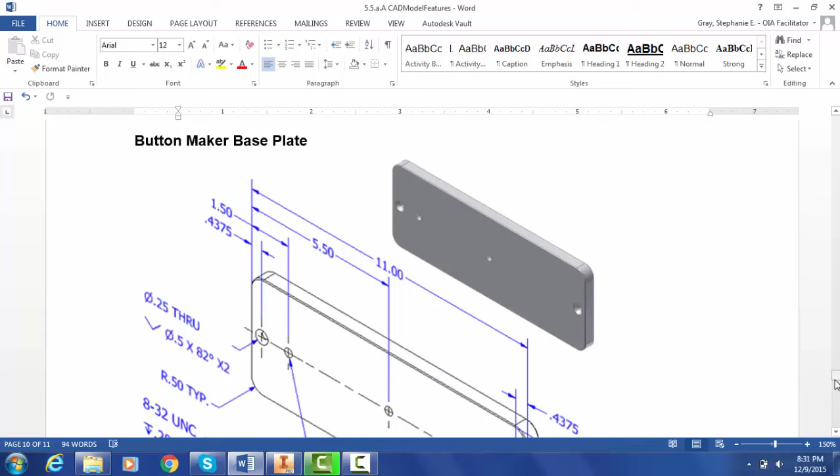So again, in Inventor, we'll start a new part and start a 2D sketch. Obviously, the first thing I want to make on here is just the rectangular shape of the base plate. And it looks like that's 11 inches by 4 inches. And then I'm going to be placing several holes on that plate.

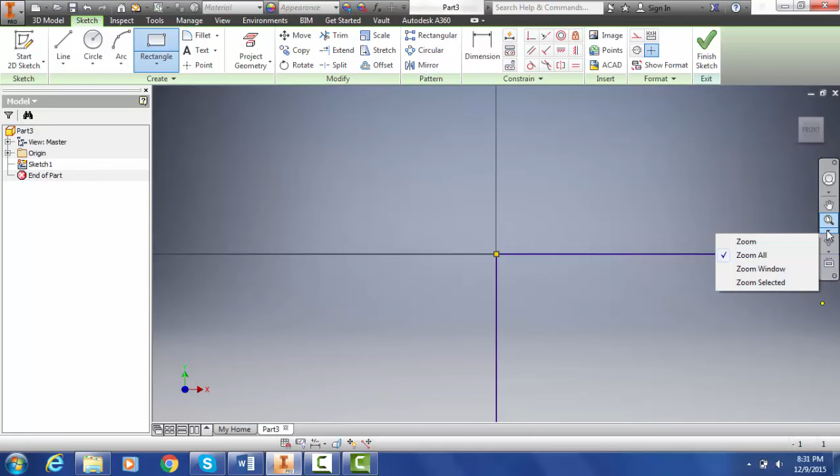So let's go ahead and start with our rectangle. And that's going to be 11 by 4. Hit enter, and I'm going to zoom all. Now if you can't see your zoom all, then you have to click the down arrow and then select it, but that's the one that I typically keep there.

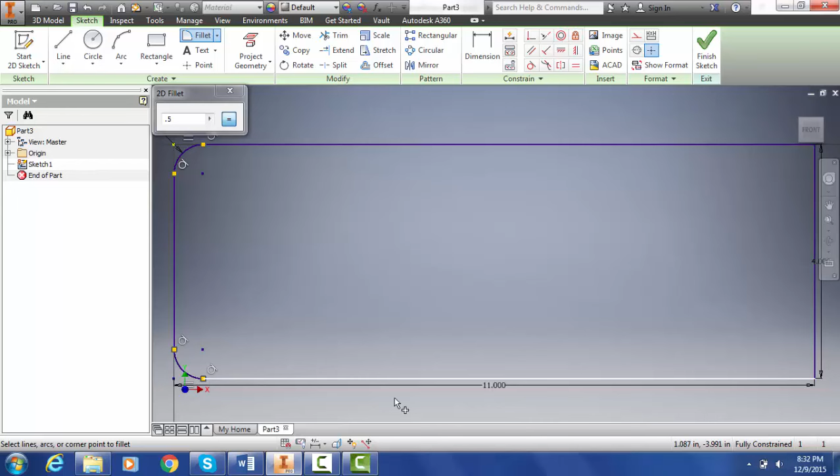I notice that these corners are rounded, and I'm going to see if they tell me what the fillet should be on that, and it looks like it's 0.5 here. So I'm going to go ahead and do my fillet there at 0.5. You can do this in the sketch, so I'm going to change that to 0.5 and then select the two lines that make the corners. So that one, and then I'll come over here and do these.

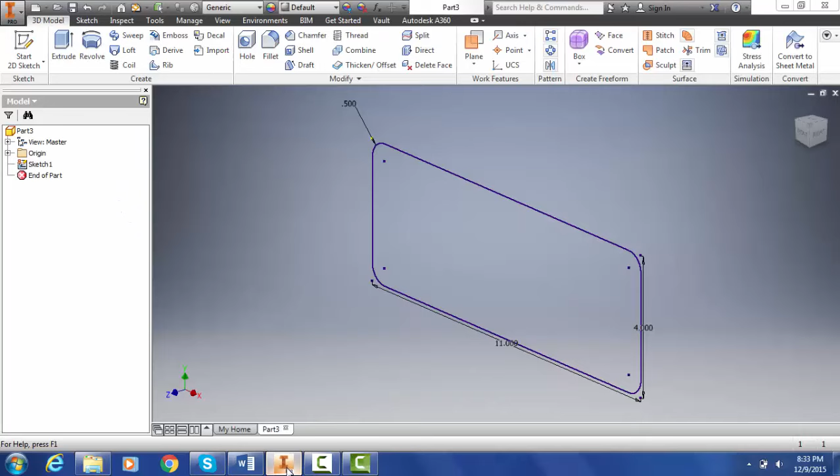Okay, now I can finish my sketch, and I'll zoom all again, and then I'm ready to extrude that base plate. So let's see if they tell us what the extrusion should be, the depth of that. Yep, it looks like it's right here, it's 0.5. So we're going to extrude this base plate 0.5 inches.

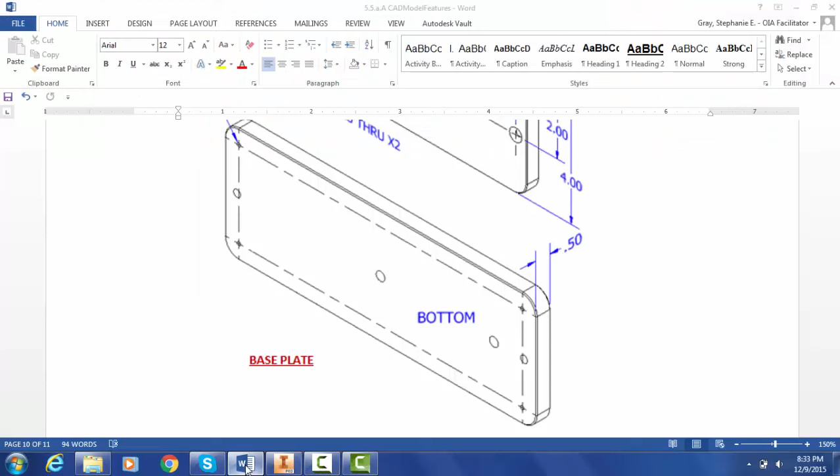Now I'm ready to place my holes, but remember I need points to do that. So I'm going to start a 2D sketch on the front of this base plate, and I need to place points, and I need to look at my diagram to be able to place these points. So it looks like I need 4 points placed. So I'll go ahead and just kind of randomly place those points, and then I'll use my dimensioning tool to get those more accurately placed.

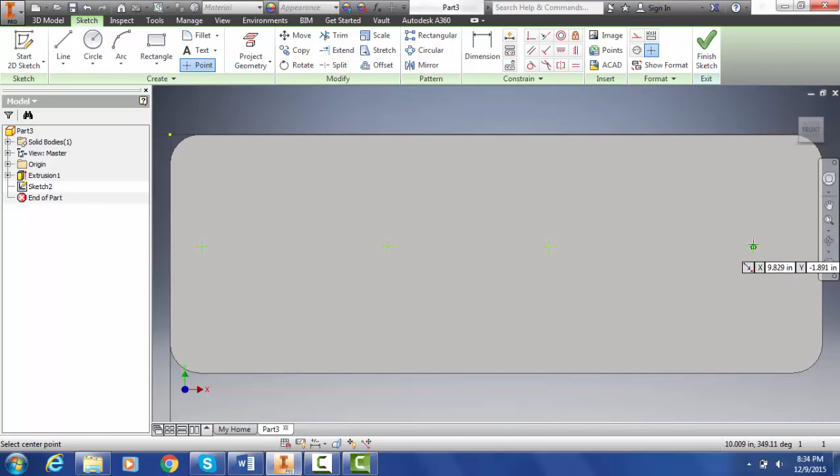So I'm going to just select my point, and I'll just click. There's one. And notice I have this dotted black line, and I really do want that because that helps me know that they're in line with each other. And then there's the 4th one there. I can hit escape and now use my dimensioning tool to actually put those in the right place.

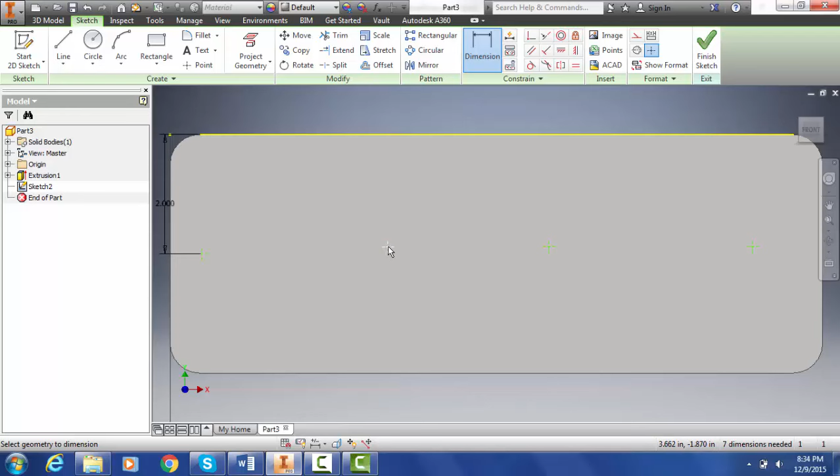So this first hole, since this base plate is 4 inches high, they're all 2 inches from the top, so we'll go ahead and make all of those 2 inches from the top. So I'll use my dimension tool, click the center here and the top, make sure that's 2 inches, and then do the same thing on all of these. That should also be 2. And then the last one here should also be 2. We can hide these dimensions later.

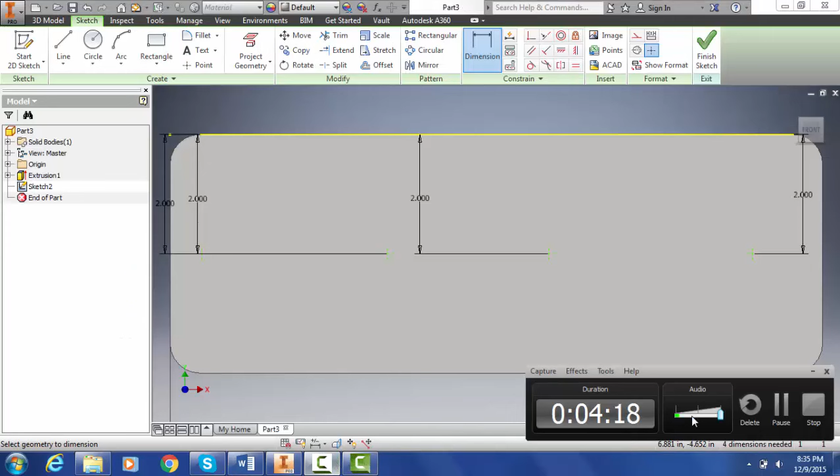Alright, so I've got them from the top. Now I need to know from the side how much they are. So this first one is 0.4375 from the side. So from this side to the middle is 0.4375. And then the next one is 1.5. That one was way off.

Then the next one is 5.5. And then the last one here is 0.4375 from the right side. So I'll go ahead and do that one.

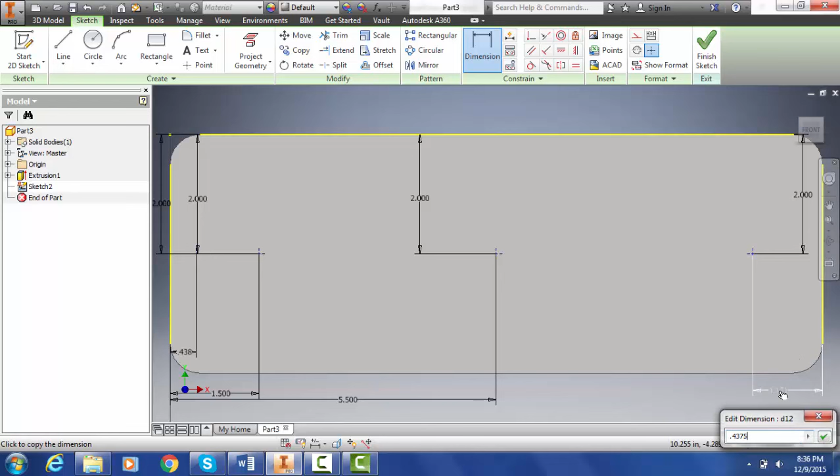Okay, so now they're all in the right place. I can hit Finish Sketch. Again, if you want to turn those dimensions off, just right click on your sketch over in the browser and turn your dimension visibility off. So now we're ready to put the holes.

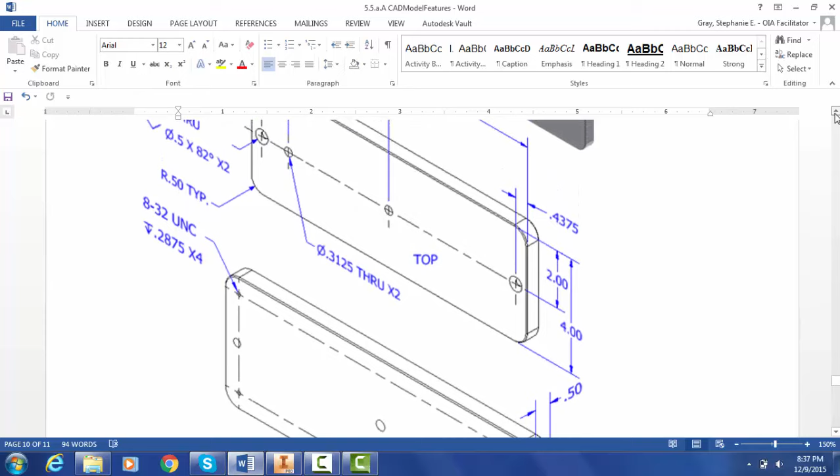Now these are different kinds of holes, and it looks like on this first hole we've got a countersink hole that is the diameter's 0.5 inches, 82 degrees, and we want 2 of those, so it's not only this hole but it's this one over here, and it's going to go 0.25 through. So I'll go ahead and make that one.

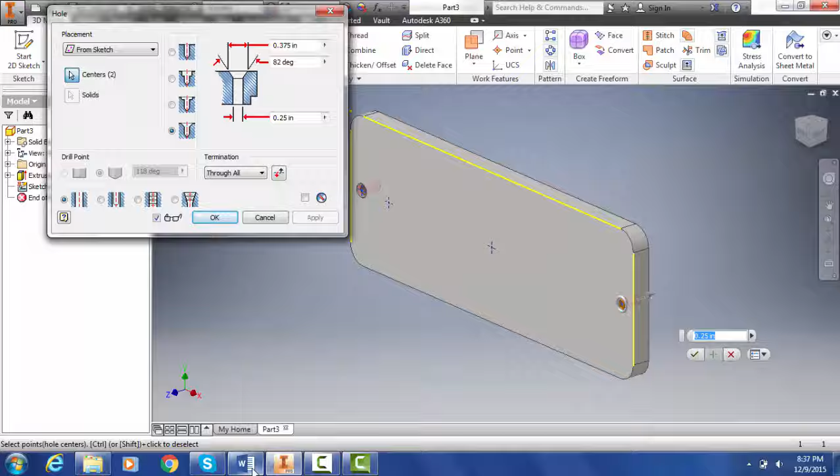So we'll choose hole. Remember, I want to deselect these two. I'm not going to deselect this one because that's going to be the same, but it does need to be a countersink hole, which is this one. And I'll need to go back and look. That's 0.5. So this is 0.5 by 82 degrees and 0.25 through.

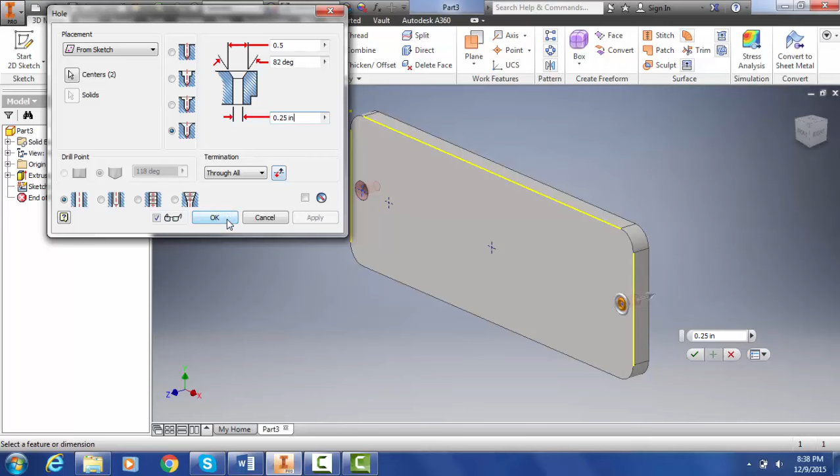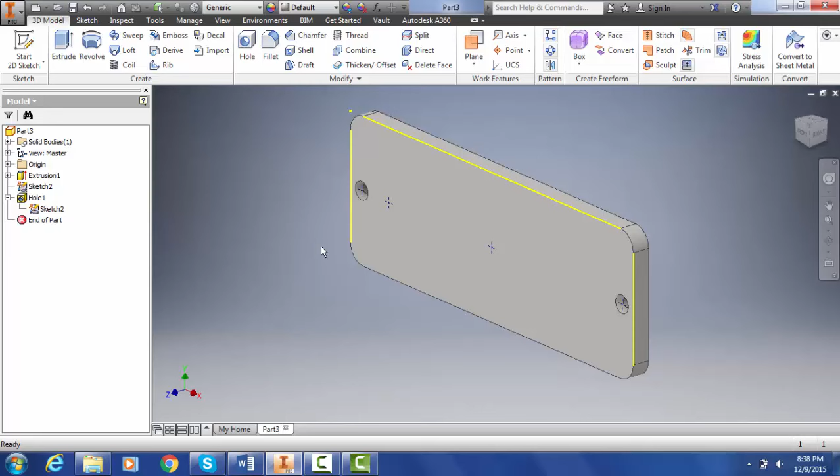So this is already 0.25, and then we'll hit OK there. Now remember, it didn't let me do these other ones, so I'm going to have to share my sketch here. So I'm going to right click over here and click Share Sketch, and now I have that same sketch again, and I can go ahead and do my other 2 holes. And those 2 holes are right here.

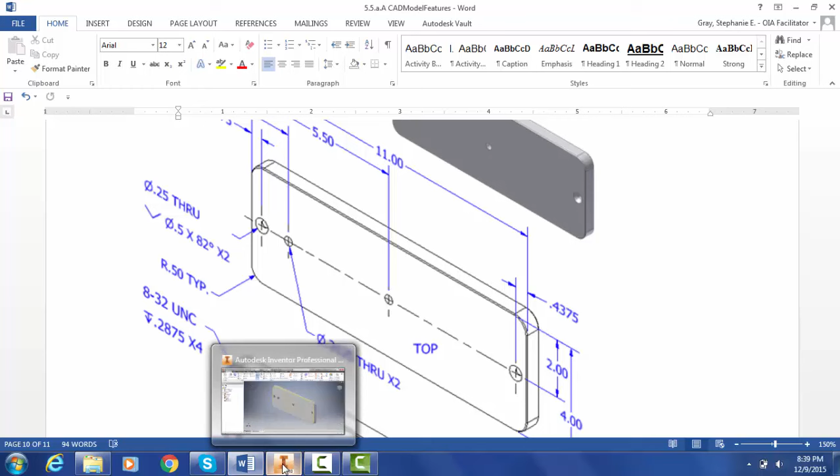They're just normal holes, 0.3125 through, and it says ×2, so that means this one and this one. So 0.3125 is what we need. So back in Inventor, we're going to do a normal hole, and it's just 0.3125. And there's my 4 holes.

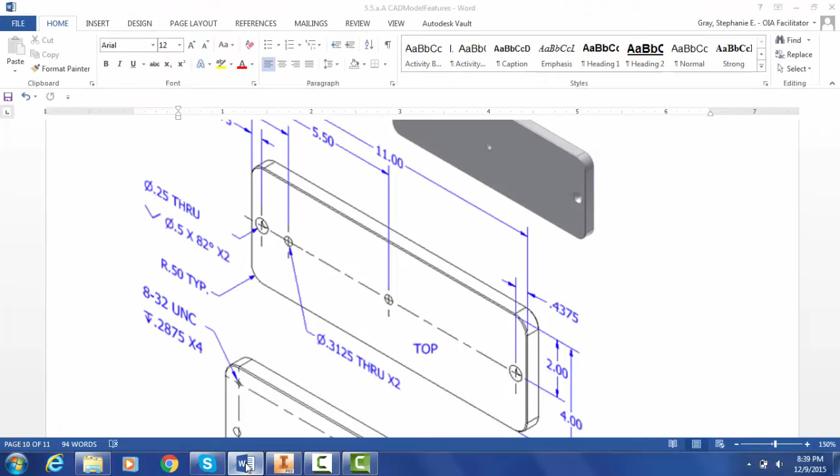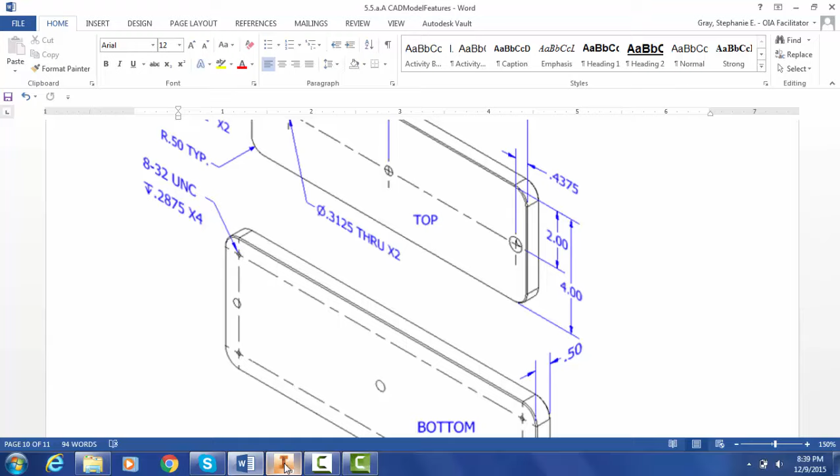Okay, now the next diagram shows the bottom of the base plate, and we just need to create these 4 holes on the bottom of the base plate so that it will get screwed down into another assembly. So we'll create those holes. So I'll need to turn this to the bottom. So I'm turning this to the back, and I'll start a 2D sketch on this side. I'm going to go ahead and zoom in on that.

And I want to lay some points down. Notice I kind of went down here so I could line it up. And then I want to line this one up too, so that they're in line with those. Then I want to line up from here and down. And I want it to also be in line with that one. So they didn't really give me where exactly they wanted these, but they just want them in line with each other. So I'm getting black lines both to the left and right and up and down.

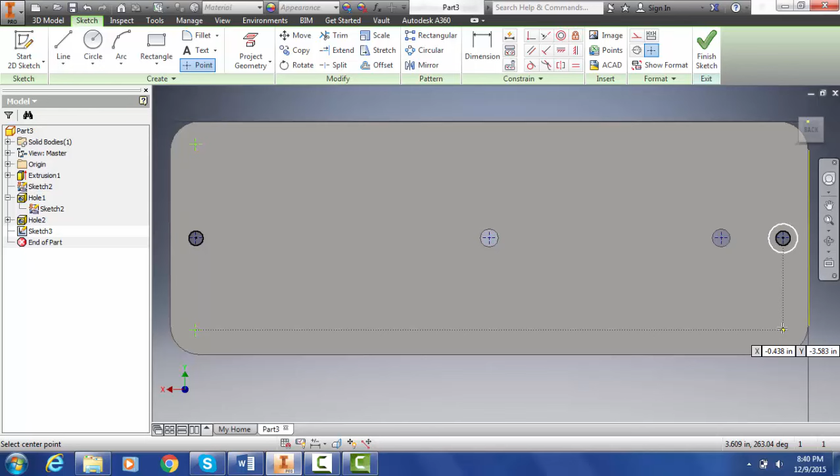I'm clicking and then going up here. I'm not clicking my mouse there. That's just something that's happening as I'm hovering over that, and then I'm clicking again. Now I can finish sketch, and I'll zoom in on that.

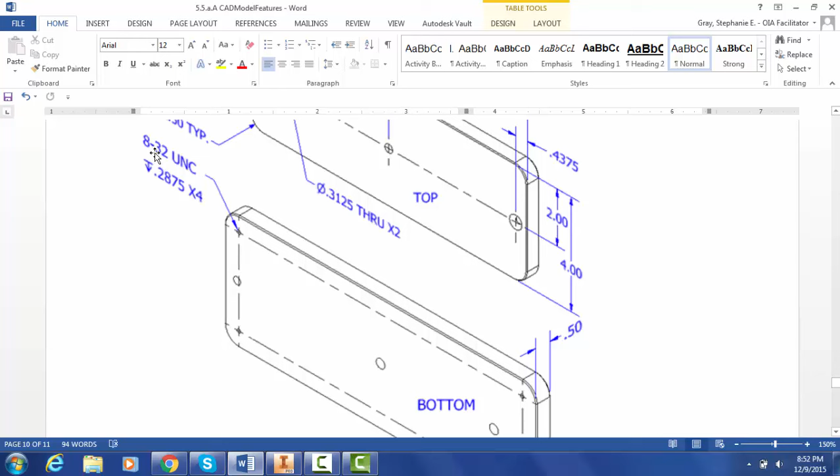Alright, now I'm going to make the holes in my base plate, and those holes are 8-32 UNC. They go 0.2875 deep, so they don't go all the way through, and I need 4 of those. 8-32 reduces to 1/4, so I need to know that when I'm selecting this kind of hole.

So I'm going to select my hole tool and then select my 4 points that I just made, and I'm going to change it to this kind of hole, and it is threaded, so make sure that that is chosen, that it's threaded, and I need the size to be 0.25 because 8-32 reduces to 1/4.

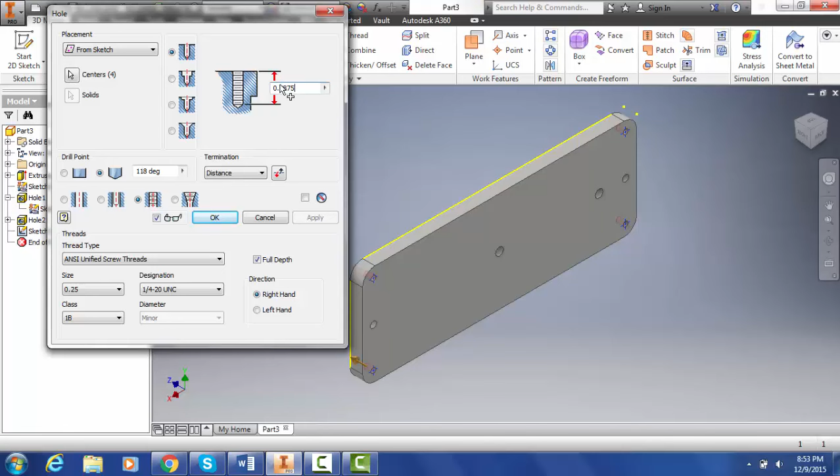And then we'll just choose a 1/4-20 UNC and leave the class as 1B, and then this depth just needs to be 0.2875, so it's not going to go all the way through, and then just hit OK. Okay, so now you're finished with your base plate, so you can save that in your Geometry of Design folder and just call it base plate.